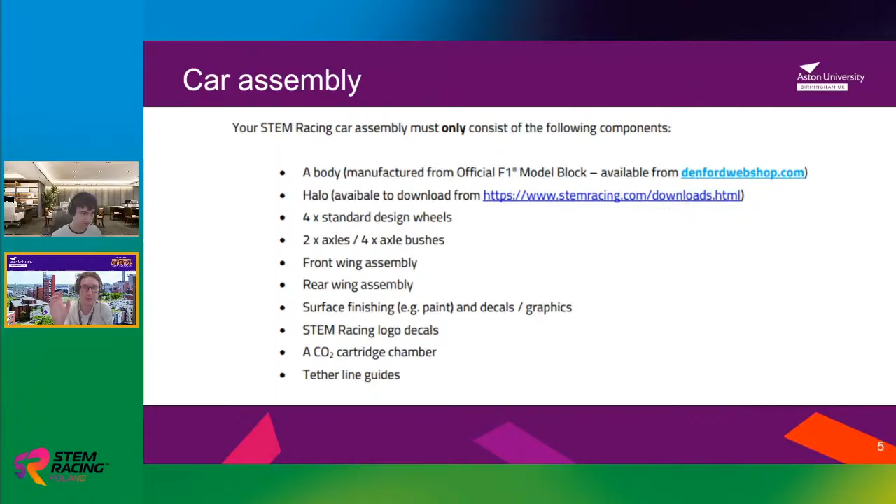You're allowed a surface finish, including decals and graphics, that will be down to you as a team to decide and adhere to. Then we need to make sure we've got our logos and a CO2 cartridge chamber. The CO2 cartridge chamber does come standard within the block, and it is at a standard height, so we need to make sure we are working within those height limits put within the technical regs. And then we need some tether line guides - so that was what we class as a car assembly. Anything outside of that starts to infringe on our technical regulations and scrutineering regulations, and this is where manufacturing and design starts looking at exactly what's involved. A lot of this is available within the downloads on the websites, and we'll go into that a little bit later.

So standard components, I've got this in two sections. These are all available to download on the website, but most importantly is our no-go zone - that's a part of the car that you cannot alter and cannot edit. You can download this, and depending on what offset you want to use, that's all available, and that's a good starting point to make sure you're rule compliant at the start.

We then need to download the halo and the helmet, and this will form the final part of the no-go zone area that you cannot affect through your design. These are all available to download on the STEM Racing website under the Download tab.

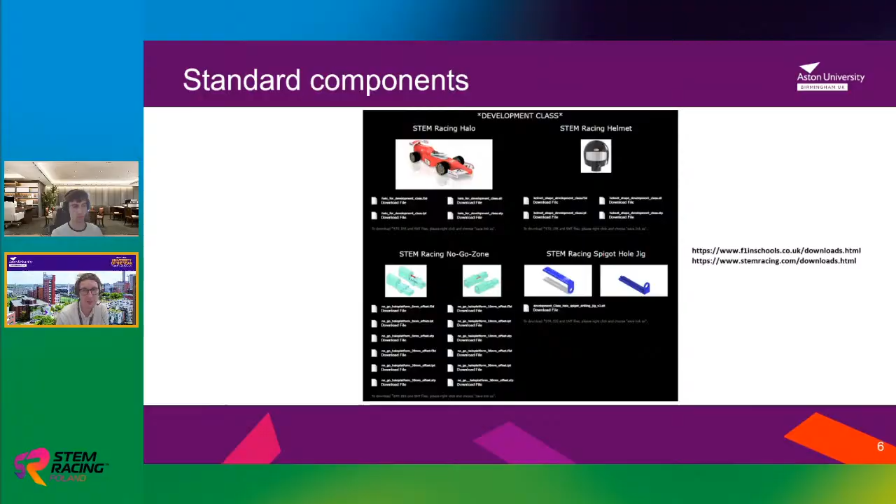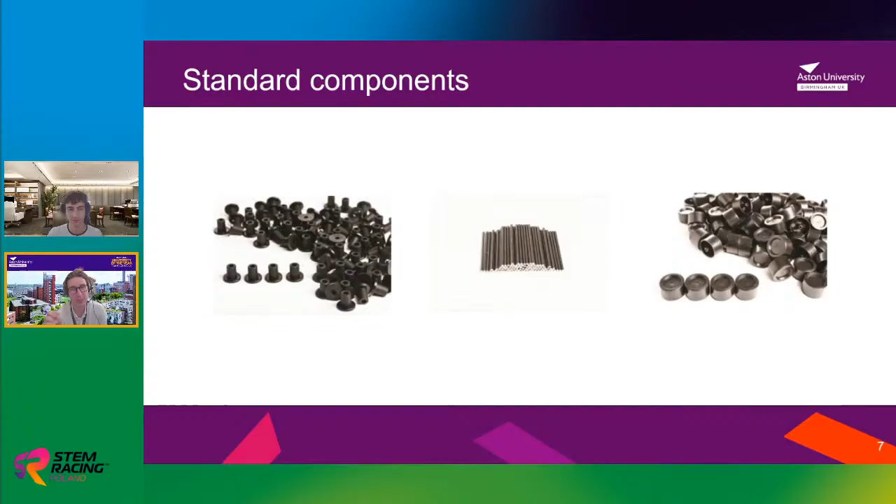Alongside these, the other standard components, on the left-hand side of the screen, are the bushes. In the middle, there are the axles, and at the end, there's the standard wheels. Within the rules, you'll be told that the standard wheels have certain dimensions. The wheels will have their dimensions specified, because within the rule set, you can make your own wheels as long as they are to the set dimensions of a standard F1 in Schools wheel.

So whenever we start thinking about the designs, it's always really good to start putting pen to paper, get some rough sketches of what you think your ideal STEM racing car is going to look like, so that we can start the ideation stage.

Once we've got past this, we've then got an opportunity to prove that we've had a design process which needs to be documented within your portfolios. So it's really important that we start documenting everything we're doing at this point of your design journey to make sure that your portfolios look as authentic and are as realistic as possible.

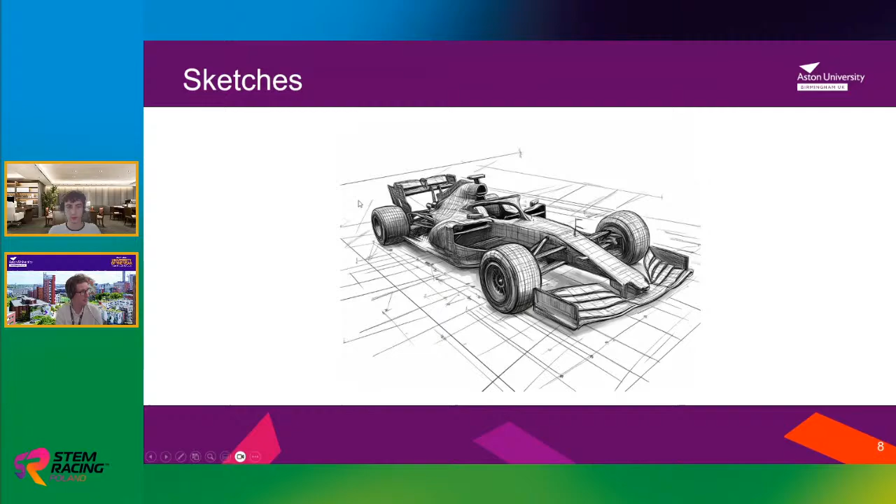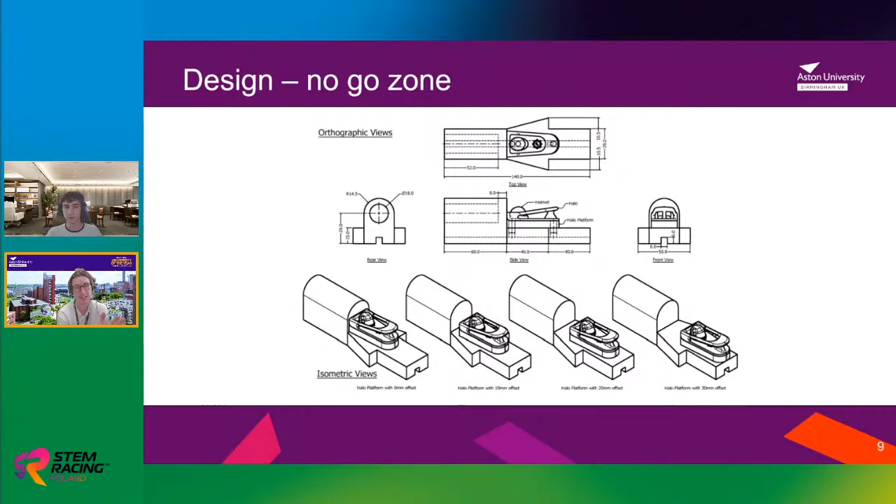Because as soon as we have decided on a rough design principle, a design idea, we're then going to need to start transferring this into CAD. To do this, we download our no-go zone, and then we can start loading it into any CAD software of your choice. Once we've done this, what I always say is start with the no-go zone and then build around it. This way you're going to ensure that you're compliant.

If you make sure you check your download that you haven't got any parameters wrong or it's not imported incorrectly, this is a good starting point and benchmark, and it will make sure that you've already hit and nailed on compliance within the regulations with a no-go zone and a halo position.

CAD software, it's up to you what you want to use. All the downloads can come as step files and STLs, so it's all transferable through whatever package you and your school are using.

Once we've done the design, what I'd say is to try and test some of these designs, so put them through some sort of CFD software - potentially not FEA because you're not going to have components under stress since you're in development class - but definitely start looking at some of the CFD.

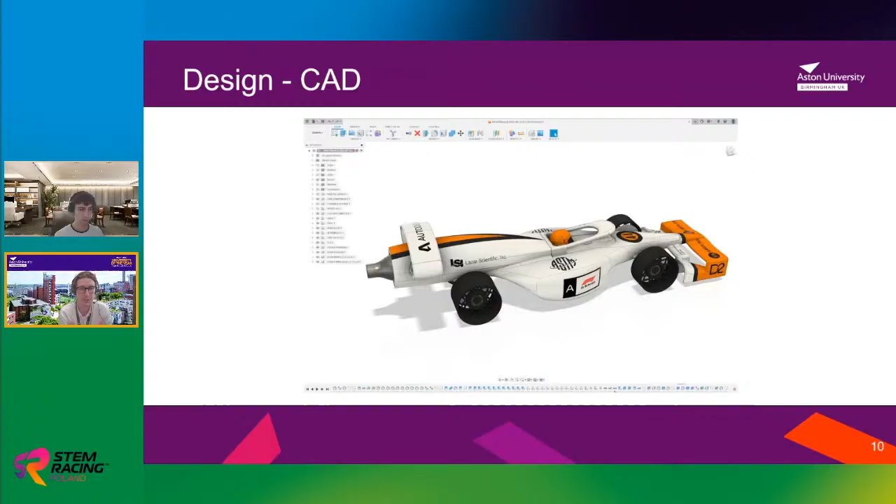ANSYS, Autodesk all have packages that you can use to do this, and you're going to start looking at what the aerodynamic drags and principles are around those cars. That can help you then analyze your designs to decide which ones you want to take forward into manufacture.

So I know I spoke a lot there. So some of the most important things to think about are how are you going to manufacture the car? Are they going to be CNC'd? Are all of your wings going to be 3D printed, or are you going to try and incorporate some into the body so they're foam? This will depend on the complexity of your wings and the forms that they're going to take.

Think about how you're going to assemble each component together. It's nothing worse than making it and then not knowing how it's going to go together at the end. Are you going to use glue, magnets, clips? What sort of other extra components are going to go into that to allow this car to go together seamlessly and look the best on the day?

Make sure you think about the rules and regulations that govern each component, and then how they govern each component once they're assembled, because they'll all have individuals, and then as they come together, they'll form part of the car that will then be scrutinized. So we need to make sure that individual parts meet, and then once they're together as a unit, the unit meets regulation compliance.

Utilize analysis software like ANSYS to optimize your car designs, and then validate it with real world testing afterwards if you've got the availability. And then make sure that you're documenting your design and manufacturing journey ready for your portfolio so that you've got everything ready as you go along.

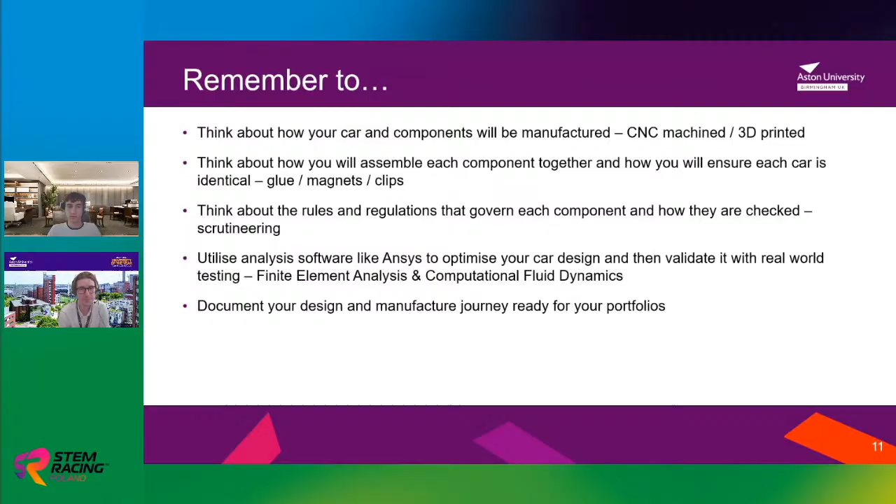So then looking at the car manufacture, the car manufacturer for most development class cars takes on a right and a left program, which is a mirror. So we'll machine the right-hand side, then rotate it by 180 degrees and machine the other side.

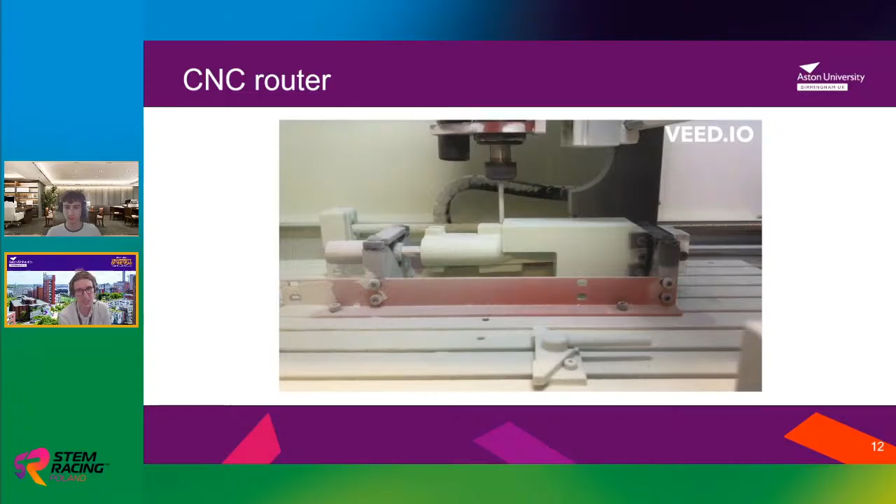If you're going to use Aston University services, we normally use a 1/4 inch ball nose cutter as standard unless you ask otherwise within your request. We can go through that later if you are going to use our services. This car is being done with a 1/4 inch ball nose, and they take roughly 20 minutes to machine from start to finish. They'll be cut off the block, finished at the front, and then you'll be able to assemble your wings on.

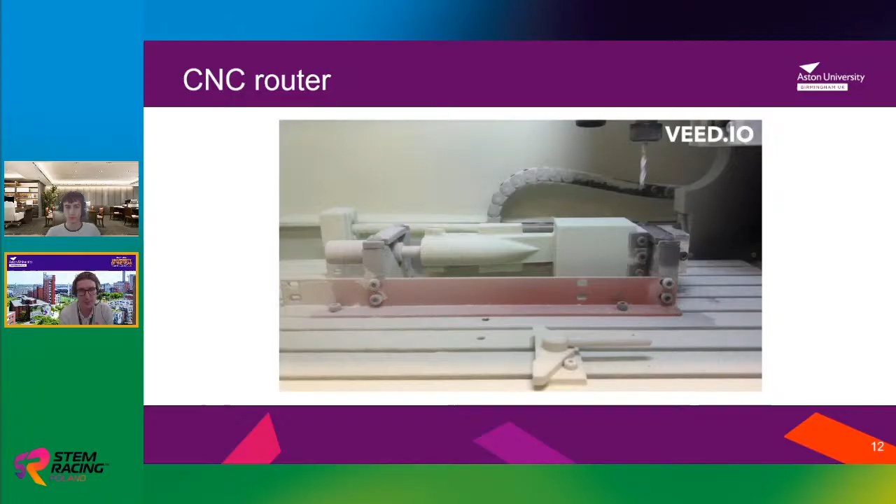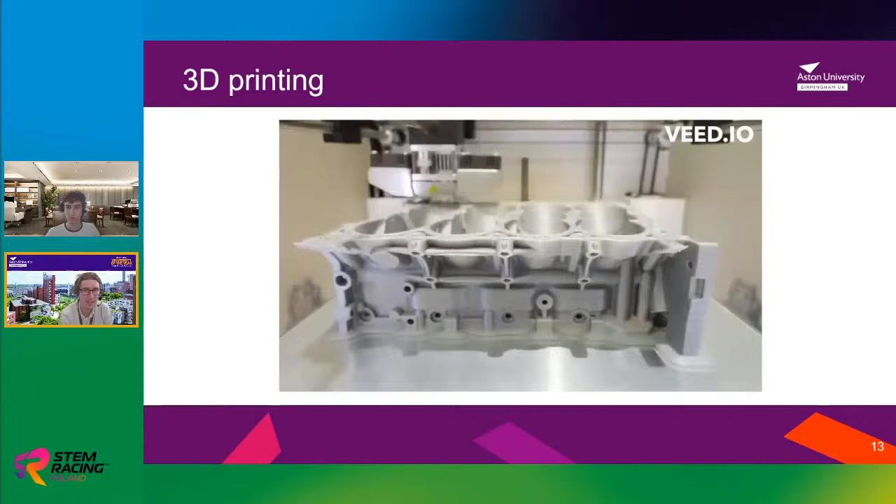Once you've got a car that's been machined, we then think about 3D printing of the other elements. 3D printing forms in layers. We normally print most of our STEM racing cars using PLA with a 0.1 layer height with about a 10 to 20% infill. This proves strong enough for most cars that we produce and gives us a nice finish.

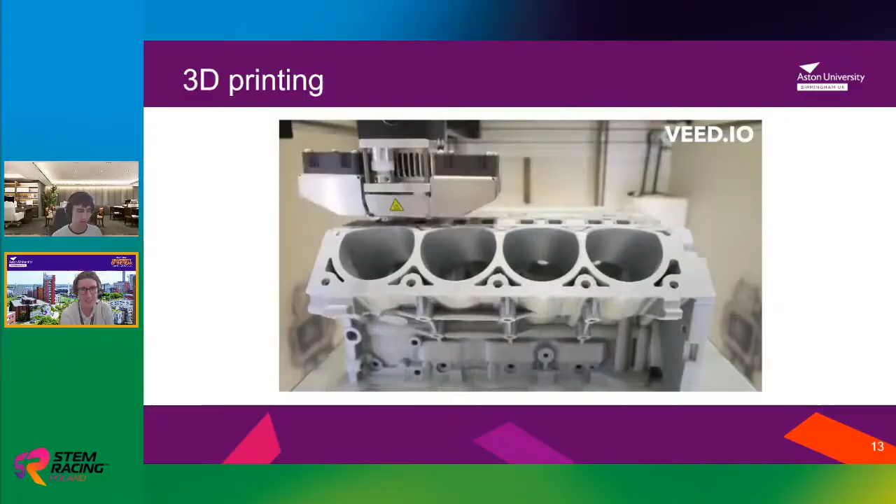These take 3 to 4 hours, and we always use a soluble support, so we've not got any breakaway structures, so that they come out a nice complete finished component. I like the one you can see in the video that's just given an example.

After the car's produced, and I'd also say that you should do this when you're designing it, CAD's great at being able to measure parts. Think about the scrutineering scorecard. It's available, it's within the regulations. Check your components as you go along and just see that everything is meeting your standards.

Build in some tolerance. Because we're doing subtractive manufacturing on the car body, we need to make sure that we build in a tolerance, because if we get something that cuts slightly undersized, we don't want to be falling foul. So I'd always build in a tolerance on all components. And the same with 3D printing - sometimes you get shrinkage, sometimes you get expansion. So make sure that we've got some tolerance to allow parts to fit together and meet the rules and regulations.

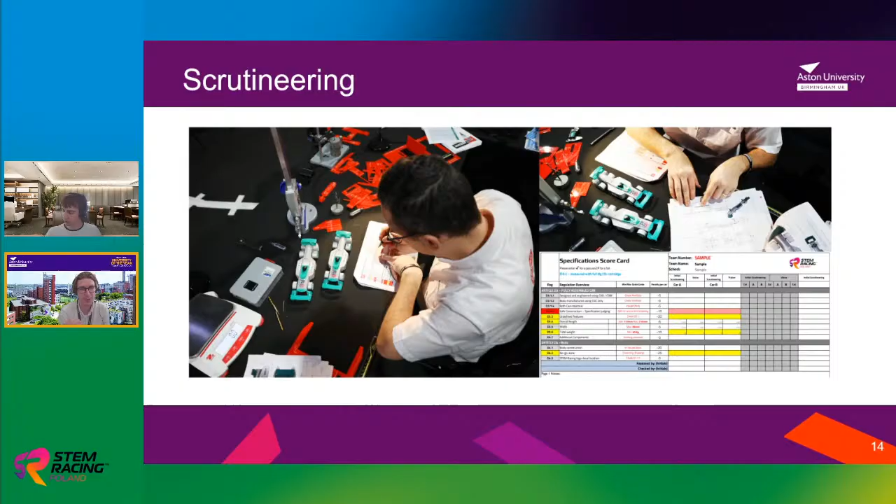Don't view the scrutineering card as the minimum that you have to hit. Build in a little bit of a buffer zone, because you don't know on the day. It might be a warm room and things might expand. It might be a really cold room and things could contract. So environmental changes can make a difference if you've gone right down to the number.

All of the scrutineering gauges that are used are available to be downloaded, and you can cut them yourselves. Most of them are laser cut components. You can make them yourselves, or if you are using our services and you wish to add this onto your order, there is something that we could produce for you as well, so that you have the opportunity to check your cars before they go to a competition.

So that's a brief whistle-stop tour of design and manufacturing the cars. For anybody that would need some help from Aston University, we offer a wide range of different types of support for teams competing from the UK, and we're happy to extend this support globally to competing teams as required.

The support that we've currently been asked to offer to anybody competing within STEM Racing Poland is design support, and then manufacturing, including the supply of materials and machining them to your individual design for a standard fee that will be set across the competition. This will include all the standard components, CNC machining of the model block, 3D printing of the wings, halo and helmet, and then the supply of all the standard components within a package.

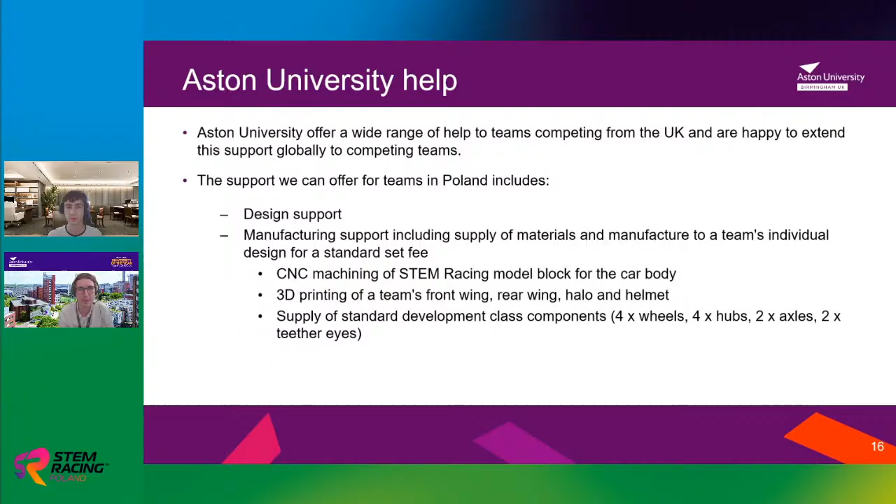If you do want to take us up on this offer, an email will go out at a later date with some deadlines to make sure that this is all achievable with postage and customs, etc. But what we will need is you to email your intention to use our support, so that we can arrange an online review meeting to ensure that whatever designs you're planning to do and are completing are able to be manufactured using the equipment we have.

Once your review is done and any changes or adjustments are made, we can have another review if you need one, but then we need you to complete the manufacturer request form and then send this along with all your files for your components to the stemracing@aston.ac.uk email address. And then what will happen is we will confirm your order, we will give you a completion date.

We will need you to arrange a courier to come and collect your components in a package. We will package it, they will collect the package to go to whatever your location of shipping choice is, and then we will invoice you just for the manufacturer fee.

Hopefully that gave a little bit of an overview and answered some of the questions that are there, but I am here and free to answer any other questions that you may have or that I haven't covered.